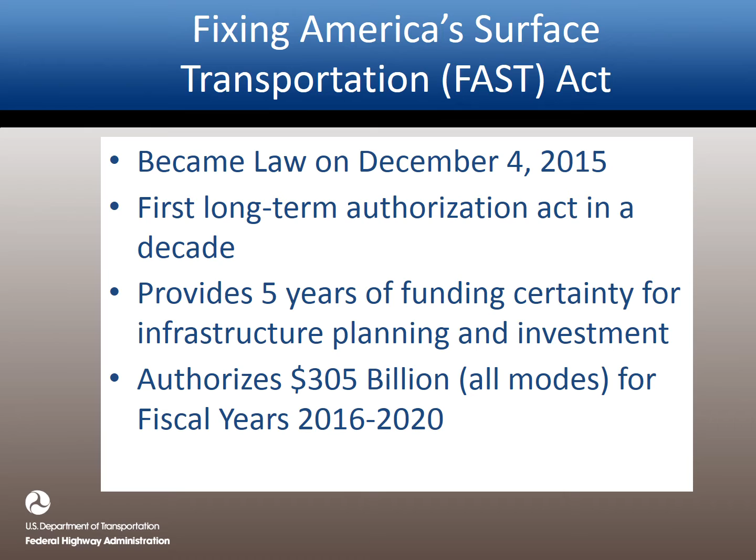But we're all very happy that now we have at least a long-term fund. And this is just those highway authorizations projected for the next 5 years. Of course, these are also subject to annual budgetary appropriations. So each year will actually tell us whether or not we'll get the full amount that's in the law or not.

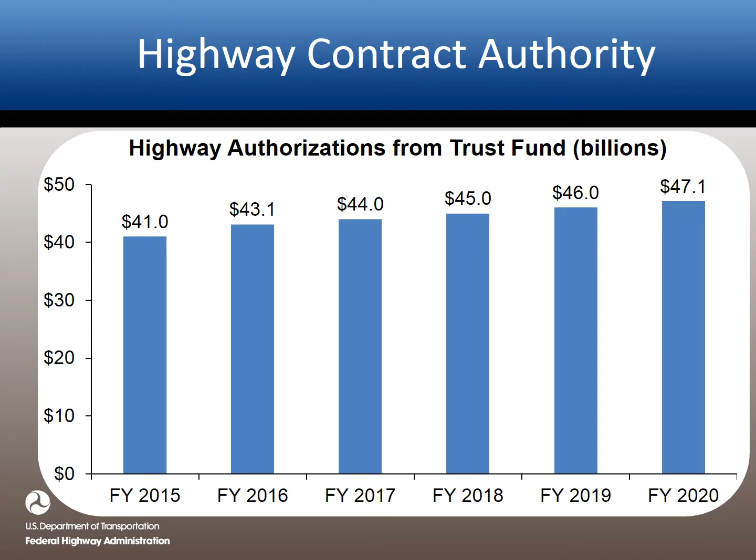So with that, I'm going to transition to more of the technical things.

Many of you know that we've got a couple of these expert task group meetings. They're really open meetings with the goal of having everybody within the industry and the community talk about technical issues. Anybody can attend those, and we encourage as much attendance as we can. It's very much an open dialogue, and you get to see the good and the bad and the ugly with everything that we do within the industry here as well.

Our last meeting was last September in Oklahoma City. John Bukowski, who many of you know, is our team leader in our office. He manages the mix and construction ETG. I manage the asphalt binder ETG now. So I'm going to touch a little bit on both of the outcomes of those two meetings in September.

We also have a sustainable pavements technical working group, and that's in kind of a hiatus right now as we work through the FAST Act program to see how that has impacted the sustainability program. But Gina Ahlstrom in our office also manages the sustainability part, pavement sustainability.

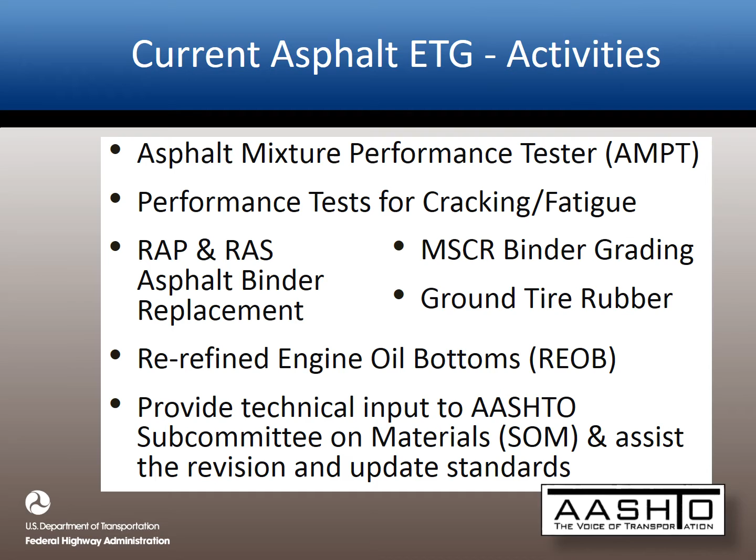I'm going to start by looking at cracking, and you might say, well, what does cracking have to do with modified asphalt? But I think most of you know it has a significant impact on performance. Some of our initiatives on the mixture side involve all the activity within the industry trying to either develop or narrow into one, or a series of 1, 2, or 3 cracking procedures that we can really rally around.

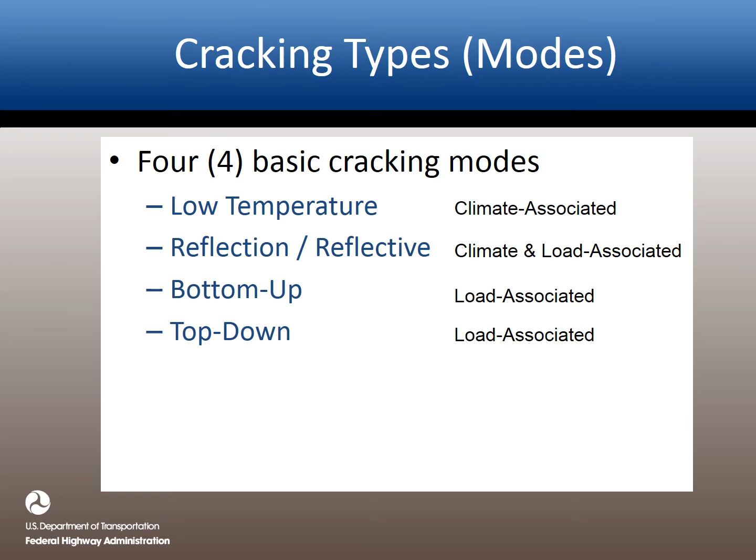So there's 4 basic cracking modes that are being discussed right now: low temperature, reflection, bottom up, and top down. They all have different mechanisms, and they all have somewhat different tests now being targeted to address those. The 2 basic loading modes being discussed right now are the monotonic, or single loading, and the cyclic loading. I think the majority of people understand that cyclic loading really represents more of what the materials see, but you also have time constraints and other things.

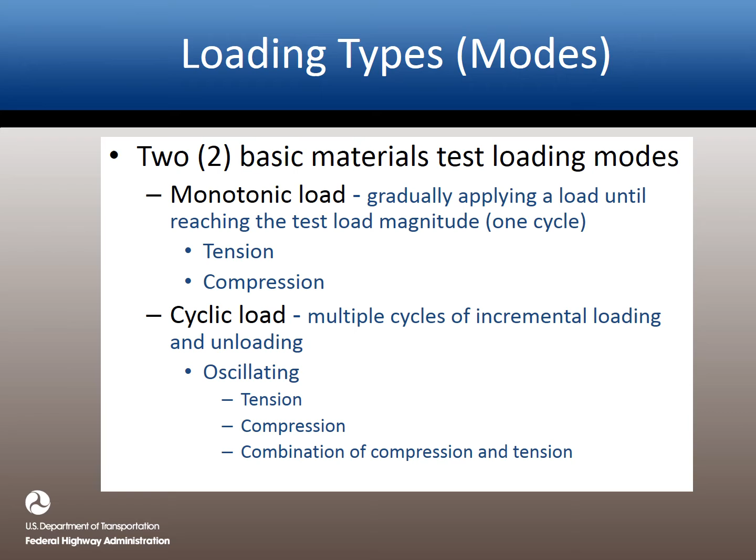So there are some people that are looking also at the much simplified monotonic tests in order to evaluate cracking performance as well. If you look at the broad range of the different tests, and I'm going to show another slide that includes what they are by name and the standards associated with them, you can see that there's a broad range of different strain conditions as well as number of loads, from that single one monotonic load to the cyclic or repeated loading. And they all have different mechanisms that are associated with those.

We all know that in reality, our pavements experience multiple load cycles, multiple load magnitudes, multiple strains, multiple temperatures. And so the struggle with the industry is how do we manage to try and capture the performance of our materials across those multiples, but also make it to where it's not onerous or something that most people can't do in their own laboratory.

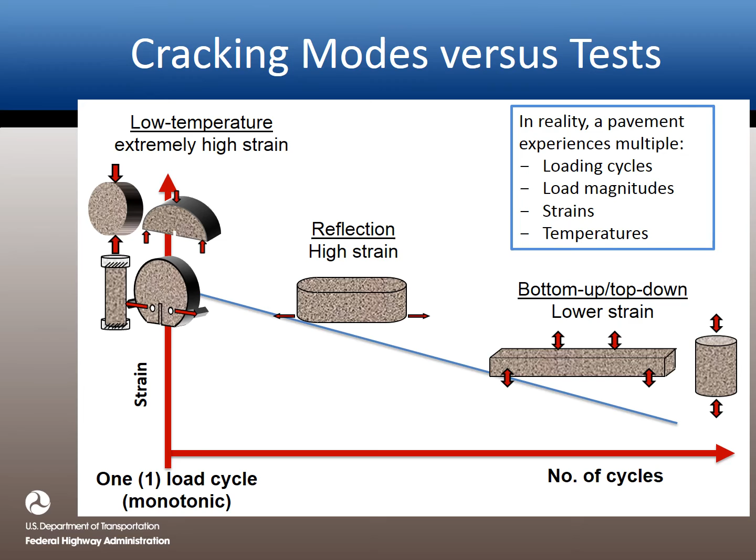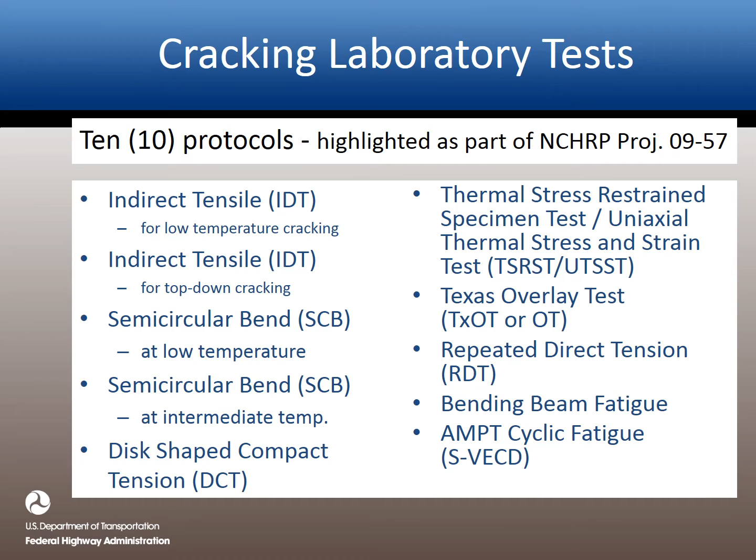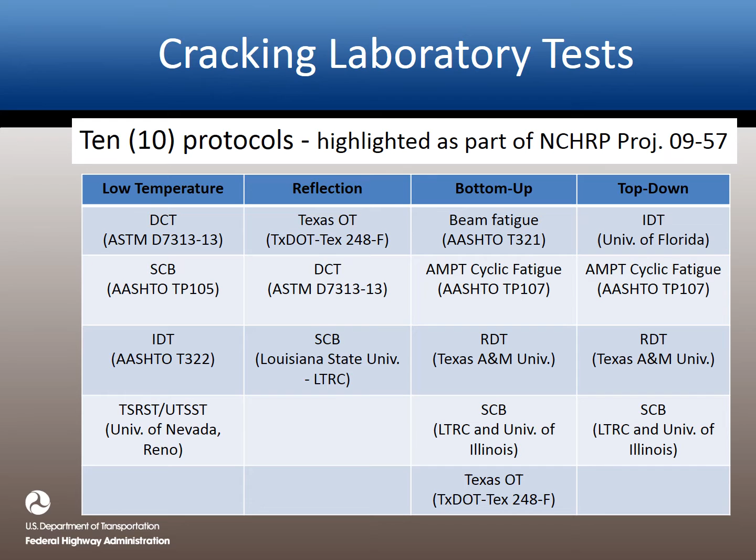This is just a snapshot of all the standards that are available for these tests. Some of them are standardized within ASTM and AASHTO. Others have state or university issued standards. Some of them are still in research and development. Some of the standards are still in provisional status and are working through improvements with the standards bodies and their technical communities as well.

I'm again going to focus on the asphalt mixture performance test because we put a lot of money and effort into the support of this equipment, as well as the strengths of the information that comes out of it. We've got a lot of standards in place already, provisional standards that run the gamut of looking at the real mechanistic material properties of the mixtures under similar conditions as what they would experience on the highway.

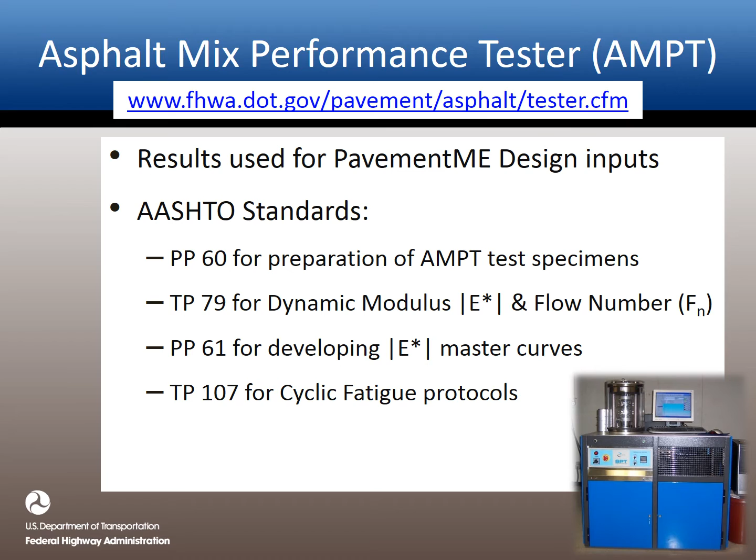And the most recent one is the one you see there on the bottom, the TP107 test, provisional for the cyclic fatigue protocol. On top of the dynamic modulus E-star test for stiffness, which is a direct input into the pavement ME design software, which Dr. Hall is going to talk about later on today, we also have flow number testing for rutting. And now we've got the companion cyclic fatigue testing protocols as well, which in my opinion aren't that complex.

The analysis methodology is complex, but I only have to hit a button on a computer to do that. I relate it a little bit to like a DSR. Binders are very complex; the DSR equipment does some very complex things in testing the material. The analysis is very complex, but we have technicians that can manage to run that equipment, run those tests, and give us very meaningful data in order to characterize our materials. And so this is a similar circumstance here with the cyclic fatigue.

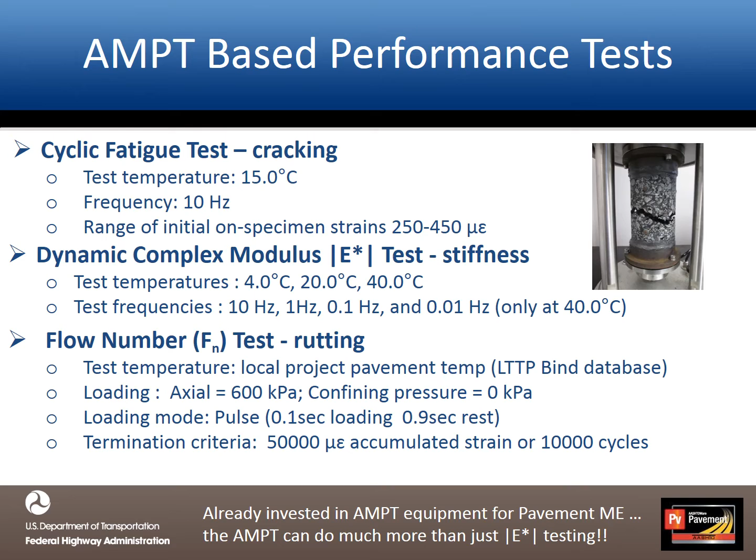So why are we looking at it? So I tried to get a top 10 list, but I failed, because I only got to 4.

Really, it comes down to the strength of the test and the information it gives you from your materials, but there's also a very strong history and pedigree that starts with the aerospace industry. There's been a lot of work to get us to this point from within our industry and outside of it, looking at material fracture mechanics, to get to where we have a very simple piece of equipment readily available to the community, and the standardization part, which is important to make sure everybody's doing the same things.

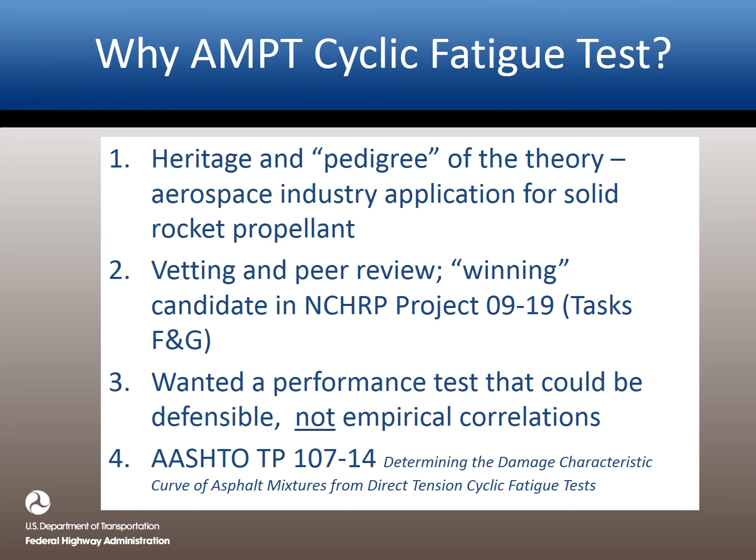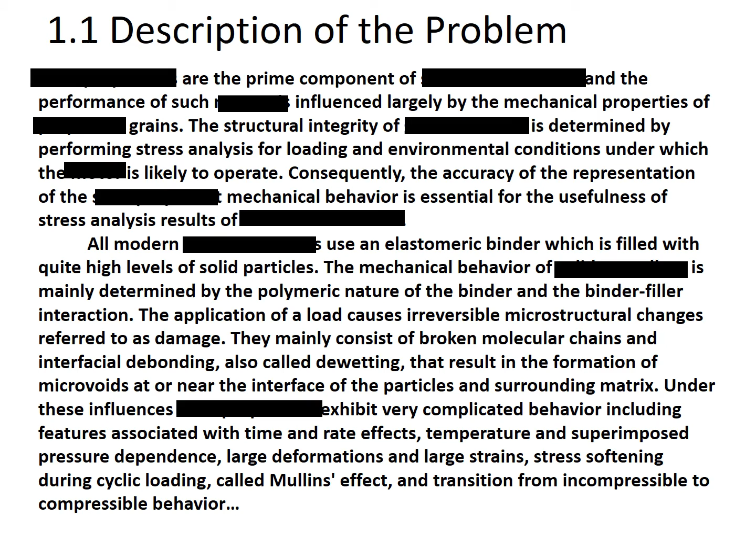If you'll let me divert a little on the background, I think this helps with understanding why we're coming this way. If you read this description of the problem, I'm not going to read it word for word, I'll let you digest it, we've redacted some of it for you to consider. You'll probably guess this isn't necessarily from our industry and community, but as you read it, it really does sound a lot like asphalt, doesn't it?

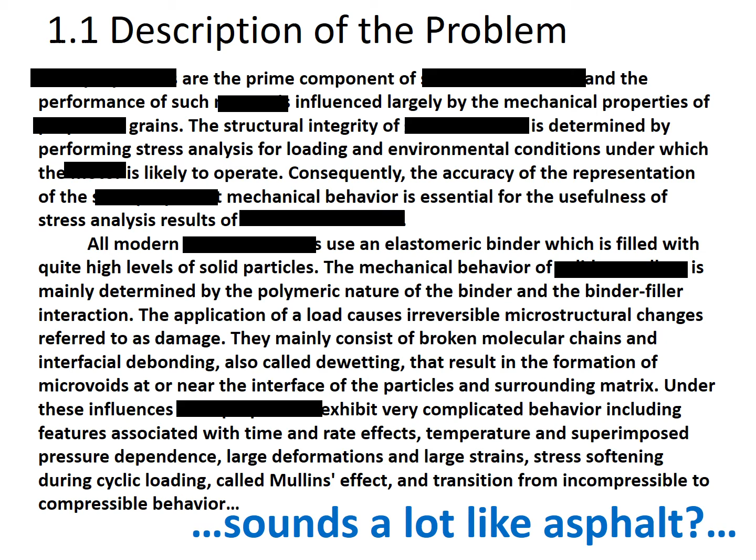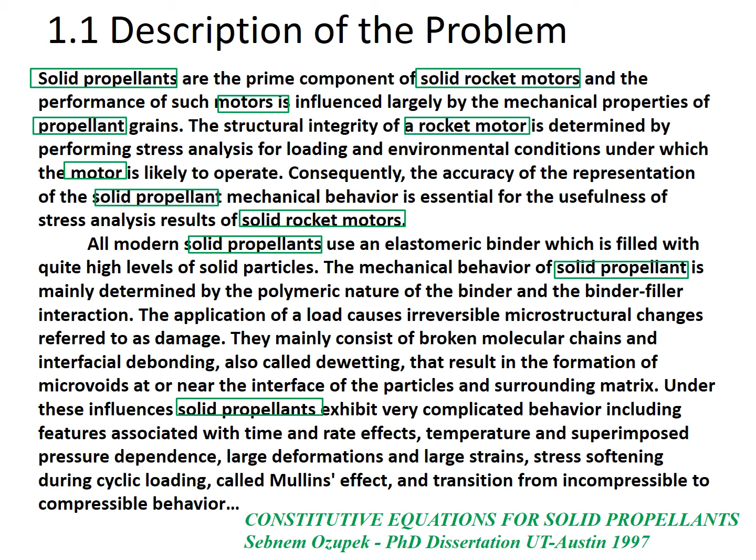But if I remove the redactions, really what we're talking about is rocket science. And you say, wait a minute, rocket science, materials, how does this all play together? Well, I don't want to make you believe that I know what a rocket scientist does or that I can design those things. But I can tell you that the methodologies for evaluating materials being developed to characterize our materials now have a solid foundation in rocket science and solid propellants. I think there's a tremendous strength there with regards to characterizing materials and modeling them as well.

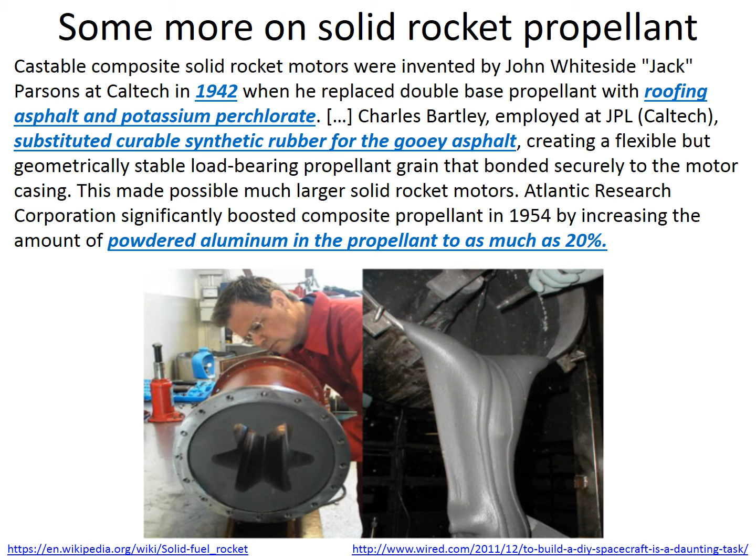So initial solid rocket propellant was primarily asphalt or rubber and mixtures of other things, and there's a long history on this going back many, many decades. That's no surprise, there's lots of information out there. For the sake of time, I'm not going to dwell on a lot of it, but I want to get to a point: now we've got very large applications of solid rocket propellants. And there's something critical to these when it comes to mission safety or protocol, and that's fracture of the solid rocket propellant within the booster rocket. That's a very dangerous thing, it leads to things exploding, uncontrolled burns. So they've spent a lot of time making sure they understand fracture mechanics in these materials, which primarily are a mastic, similar to asphalt and other materials, similar to what we deal with in our pavements right now.

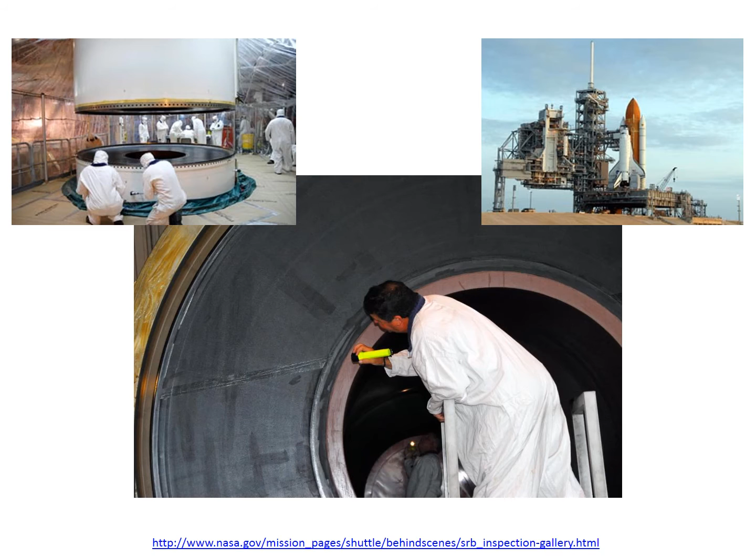So why is that important with the burn rates? There are a lot of different shapes of these solid rocket propellants to try and control burn, how quickly they burn, the burn shape, the burn pattern, how much thrust they get, how long this thrust is maintained. But one of the things is they've got a very narrow window of temperatures where they operate with maximum efficiency. And if they're outside of that range, they tend to have cracks or fractures within that propellant. And if left undetected, which is very hard to detect when they're in that totally fabricated state in a rocket, things go incredibly wrong.

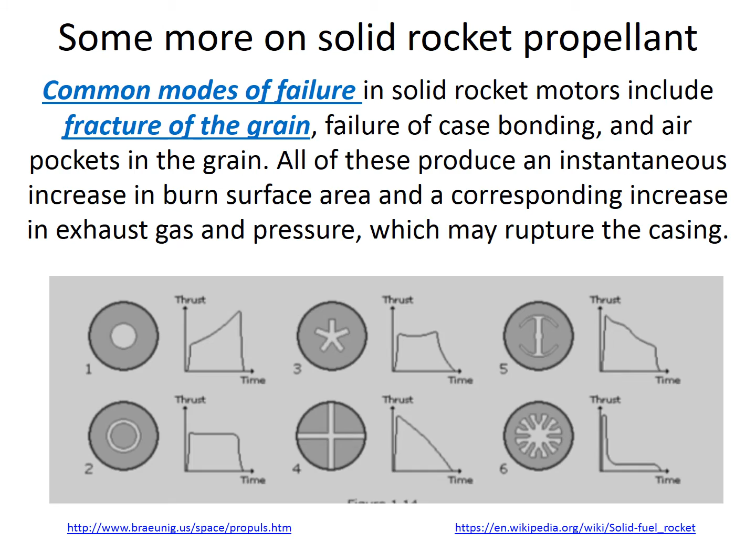I do have a brief video here that I think is great, I love these old videos, so some of it is a little bit for entertainment value. John, if you could slide forward to about 8 minutes, 30 seconds, this gives a better idea of understanding what I'm talking about for the basis.

Primer to set off a larger charge of powder, which in turn ignites the propellant charge. From this point on, the action is just as we've already explained. The high-pressure gases created by the burning propellant, accelerated by the nozzle, act to give the motor thrust. All rocket motors carry both oxidizer and fuel, both mixed together in solid propellant grains in such a way that they remain inert until ignited. Fuels most commonly used are asphalt and oil, rubber, or rosin. Oxidizers are usually potassium perchlorate, ammonium perchlorate, sodium, or potassium nitrate. There are some compounds which furnish both fuel and oxidizer, such as nitroglycerin, nitrocellulose, or ammonium picrate. Propellants of this type must be mixed with inhibiting materials so they will burn rather than detonate. The regular fuel and oxidizer mixtures are frequently restricted too, but only after they've been mixed and molded according to the design purpose of the rockets for which they're intended, when certain surfaces are coated to control burning. These are called restricted burning charges.

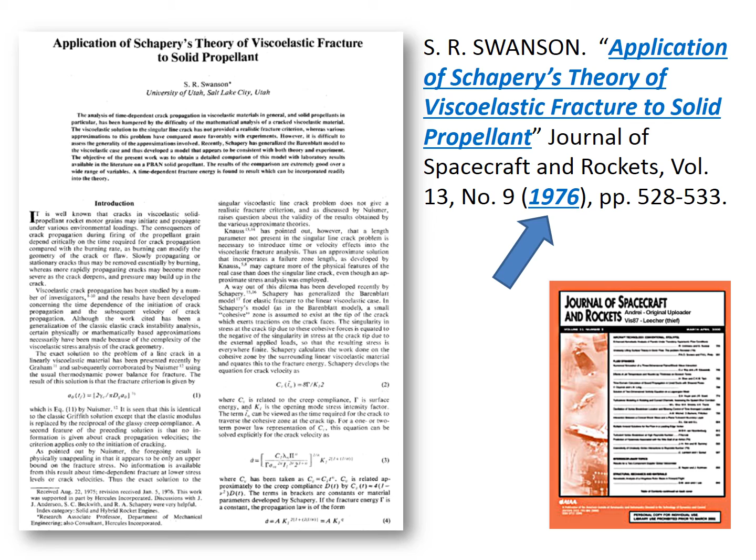That's moved onward into work done by Dallas Little at TTI and Dr. Richard Kim, that's at North Carolina State now, to develop the viscoelastic continuum damage model.

And that's where usually people's eyes start to glaze over, because you start saying things like continuum damage, and simplified continuum damage. And that's where I always like to refocus people and say that these are complex models, they are complex characterizations, but the tests to run and the inputs for those are really not that complex. And we've got the tools to do that now.

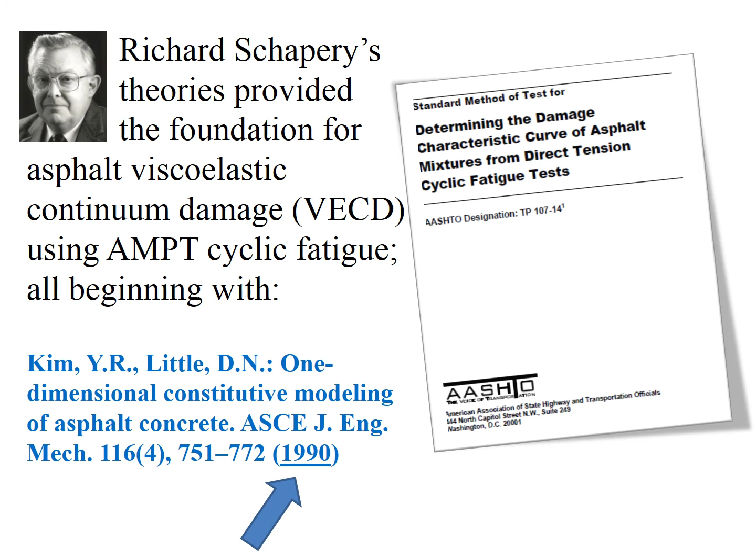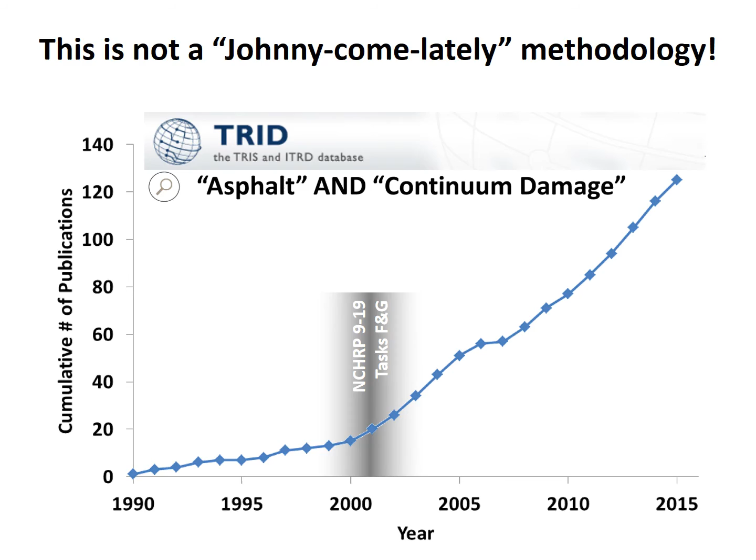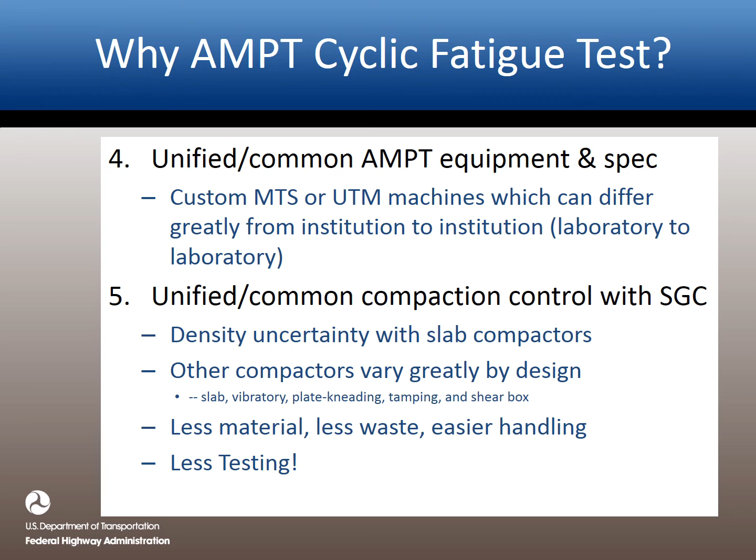As I mentioned, we've got unified common equipment now. We've got unified common compaction controls, unlike some of the other methodologies, the other fracture tests that are being discussed. We've got the leveraging extended time temperature superposition within that system, so now we don't have to test at many temperatures or as many loading or strain conditions that we would have to with a lot of the other tests, and we can get much more meaningful information, similar to what we do with binders as well.

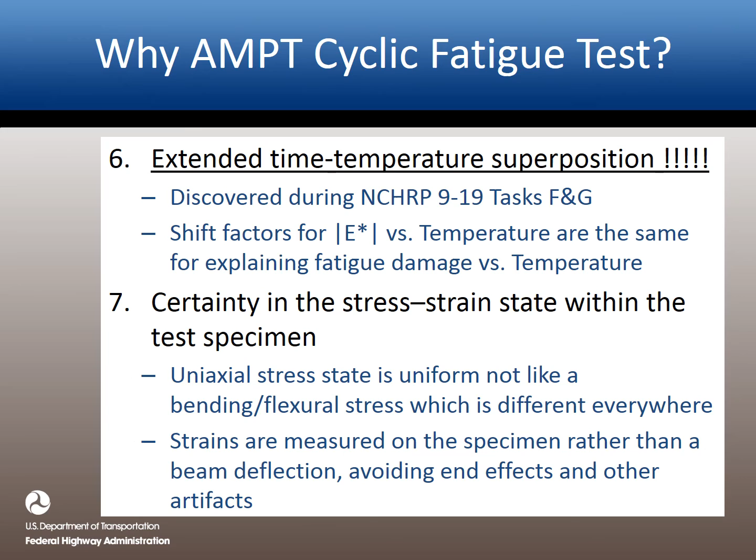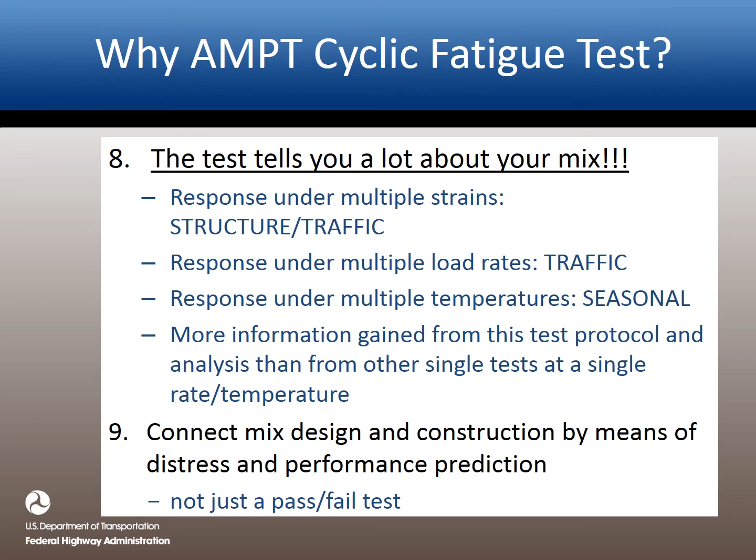There's much more certainty in that stress-strain state within those cylindrical specimens than beams or other shapes that are being used in some of the other tests as well. But the bottom line is really it tells you a lot about your mix, and it connects that mix design to our construction and our distress prediction and what we're seeing actually in the field. So that's something that we're really excited about.

So now we'll get into some other areas, and I'll be quick and brief. We do have a new RAS task force within the expert task group, looking at issues primarily with regards to shingles, because shingle binders are very much different than what we're used to working with.

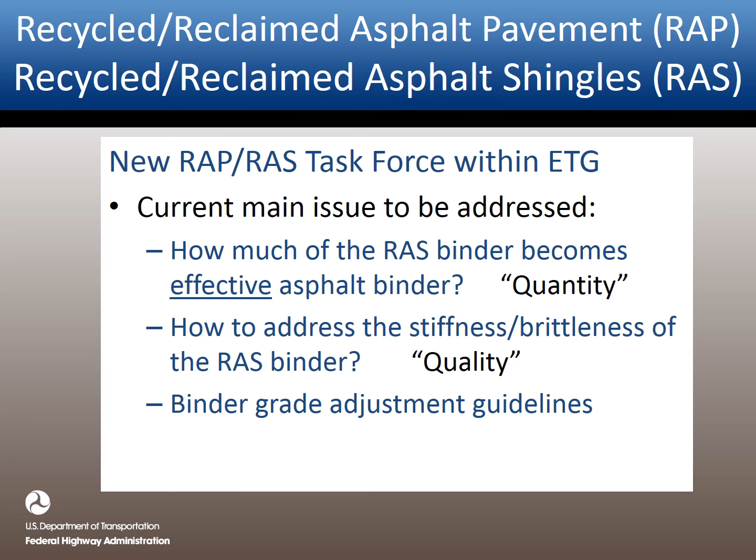They have different characteristics, much stiffer materials. If they've been sitting on a roof for a long time, then they're very highly oxidized as well. So we're struggling as an industry with how to effectively use these binders and how to address the quality of the materials that use those. Right now, the focus is tending towards the brittleness of that blended binder.

There's discussions on what we're calling the delta TC, or critical temperature, determined by your BBR criteria, the stiffness or the S value, and the relaxation critical temperature determined by the M value. You're going to see this come up as a constant theme in a lot of the things that we're doing now to characterize materials, because of a lot of early failures that we're experiencing across the country in the field that aren't always associated with this aging characteristic or this ability to relax over multiple cycles, but it's a contributing factor.

So things like recycled engine oil bottoms and other materials that are getting higher usage, we feel like this is going to be a good tool and a simple tool with tests and data that are already available to us in order to try and control that parameter as well.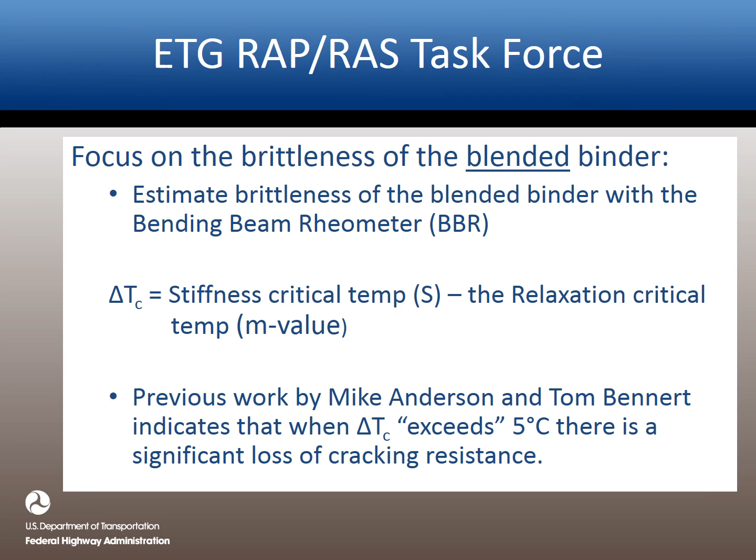From a worst case scenario, we think this will work because the blended binder, assuming it's 100% blended—I think we can all agree that's probably not likely the case with RAS binders in actual practice and construction. But with the assumption of fully blended binders, then we're giving a kind of a conservative approach there.

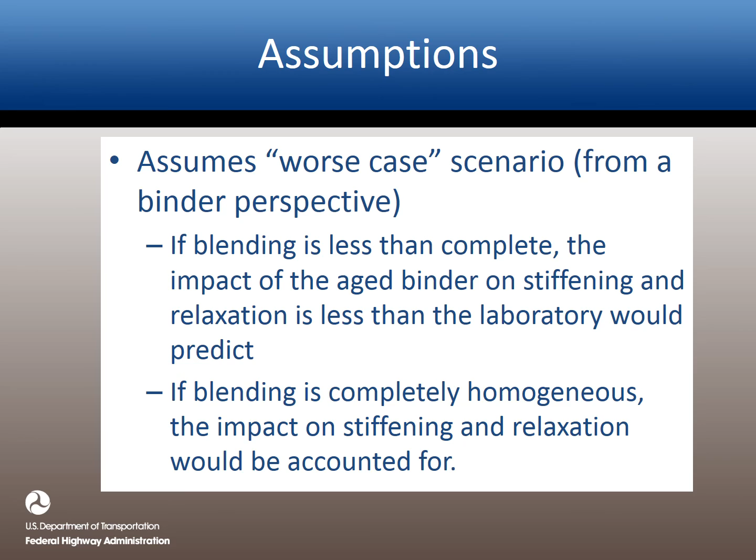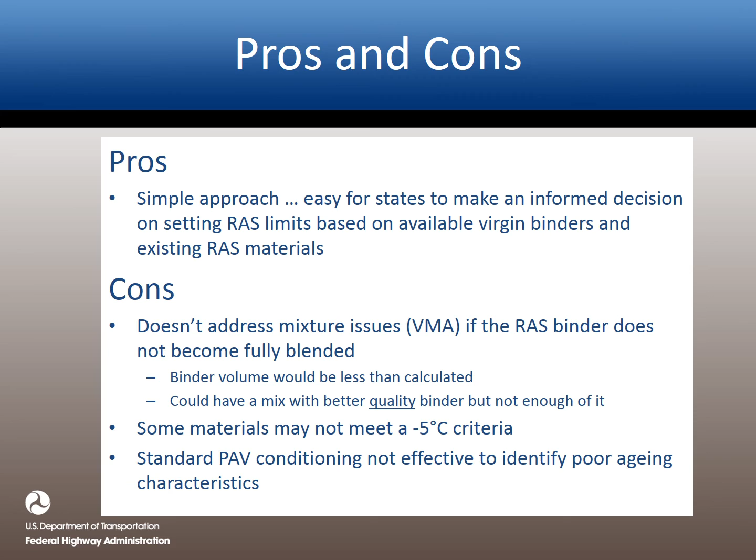There are some pros and cons. I think one of the biggest cons is that it doesn't address the other mixture or volumetric issues associated with the use of shingles, the materials that are contained there aside from just the binder, as well as how do we make sure other materials being used within our industry are not inappropriately caught up in the criteria. That's some work that we need to do as we move forward.

And then it also gets complicated when you add RAP and combine all these other things together like we typically do. So right now we're developing some recommended proposals. We've got a lead on that task group and a lot of other people. One of the recommendations, possibly to further simplify it, is to have a recycled binder ratio limit or a conservative limit based on that delta TC criteria.

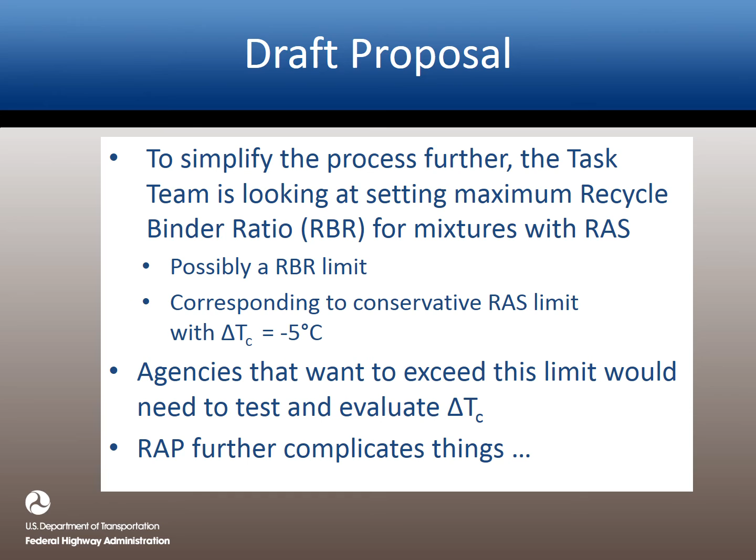It would likely be lower than what we're seeing in practice now across the country as far as weight or volume of shingles that are being allowed. But if somebody wanted to exceed that value, then we would have additional criteria to do additional test and characterization to make sure we didn't have a negative impact.

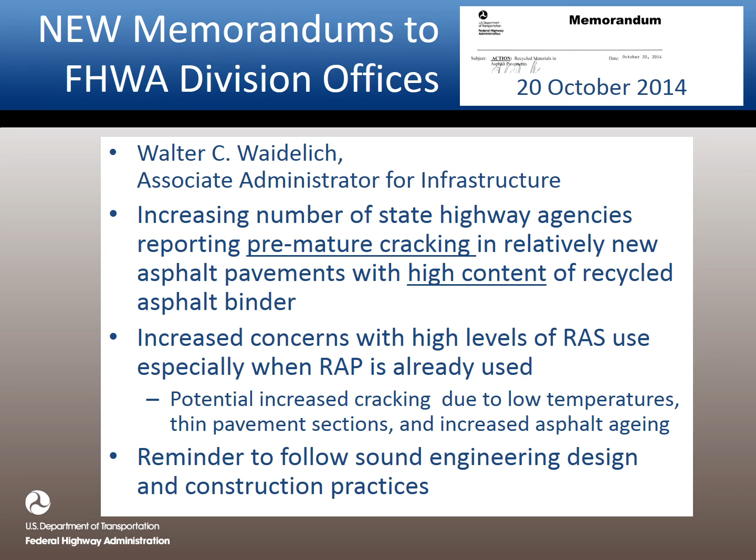I quickly want to mention we've got a couple memorandums out we've issued to our division offices to highlight this issue with our state agency partners, because we very much wanted to get ahead of some of the failures we were seeing in the field. So we've directed them to pay some attention here and work with our state agency and industry partners to make sure it's not an issue within their state and to make the right revisions.

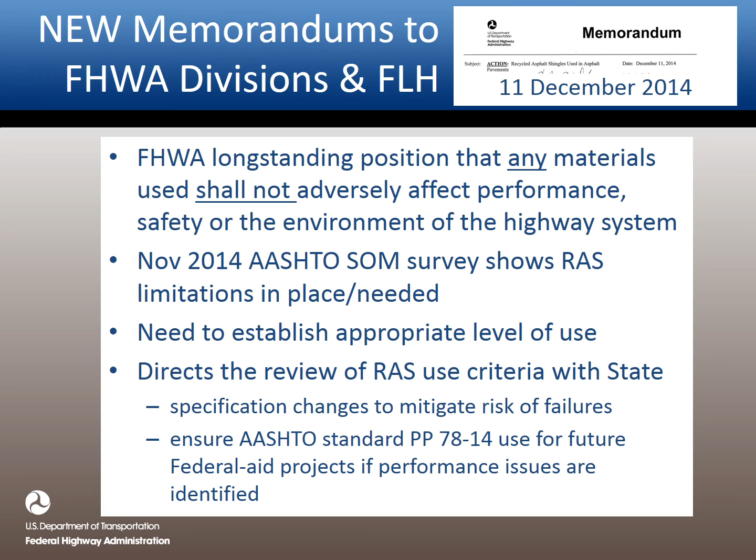We also like to highlight and remind everybody that our long-standing position is that any of these recycled materials should not adversely affect performance, safety, and the environment. So even though they may be environmentally sound and we're always looking to recycle materials, we do have a primary goal of making sure that we've got performance. That's one of the driving factors here in the recommendations.

MSCR activities are ongoing. Mike will probably mention that as well—Mike Anderson, when he discussed some of their activities. We work very closely with AI through that cooperative agreement to get information out and listen to our partners. We are really targeting, as more and more of the use and standardization, regionalization of this standard is occurring, we really do want your feedback on how those things are working for you, to see if there's anything we need to address or refine moving forward. So please work with us and work with Mike and his group to do that.

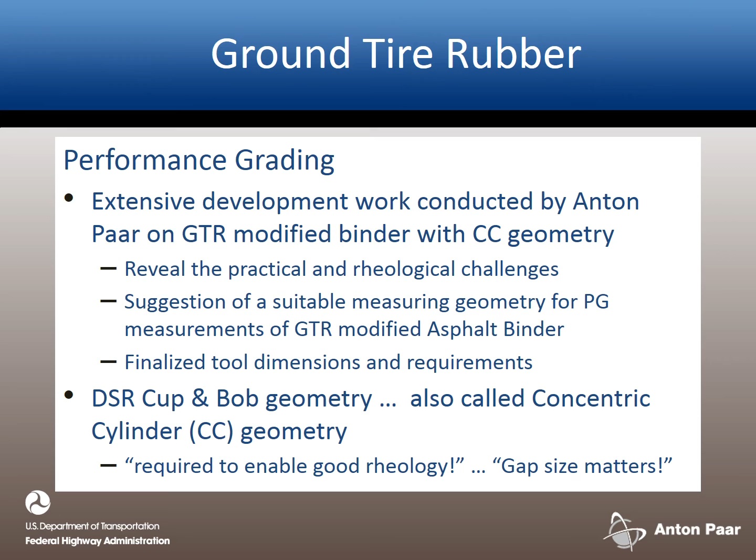Ground tire rubber has kind of fallen off a little bit in urgency, as it was just a couple years ago, but we're still doing a lot of work there. I think one of the biggest activities that have come out of that is the standardization or finalization of the cup and bob geometry.

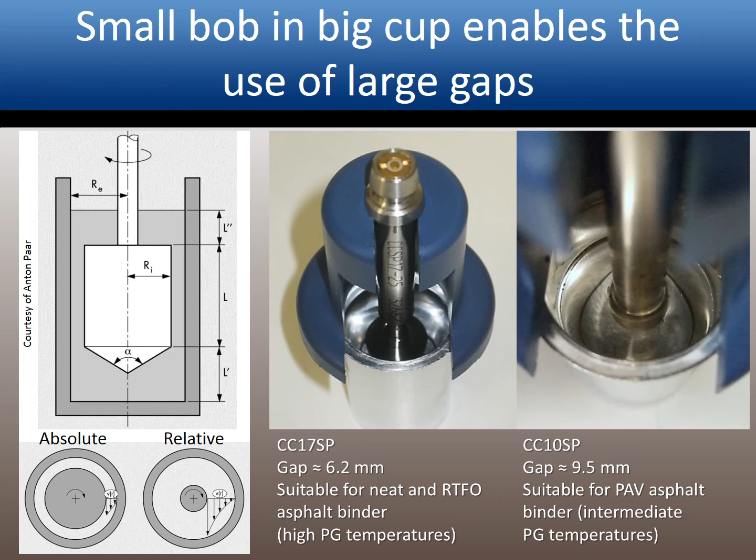That geometry has been primarily driven by work from Anton Paar in cooperation with Caltrans and the universities in California. This is going to go a long way for us to try and move these materials into our PG grading system. We're looking at leveraging all that previous work and moving forward with characterization protocols using the cup and bob geometry.

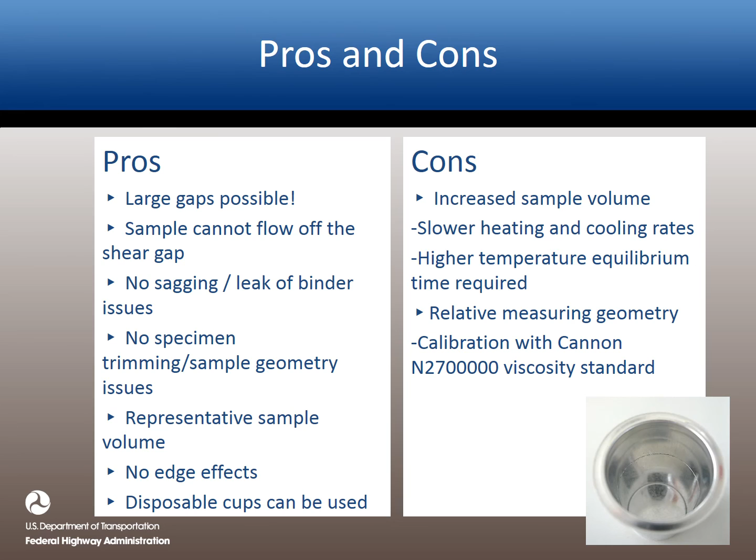There are, like anything, pros and cons. It's a larger volume of material, and it's going to take a little bit longer to heat up and get temperature equilibrium, things like that. But I think the pros far outweigh the cons.

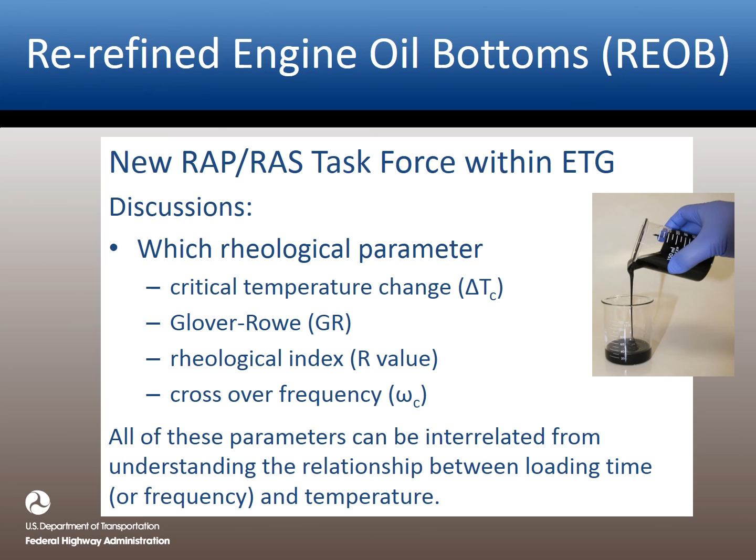Re-refined engine oil bottoms - we have a new task force on that item as well, looking at rheological parameters. That one's also coming to fruition, focusing and moving forward with delta Tc criteria. It fits into the same characterization scheme as far as making sure we have materials that don't age at an accelerated rate and still provide us that relaxation over multiple environmental and loading schemes.

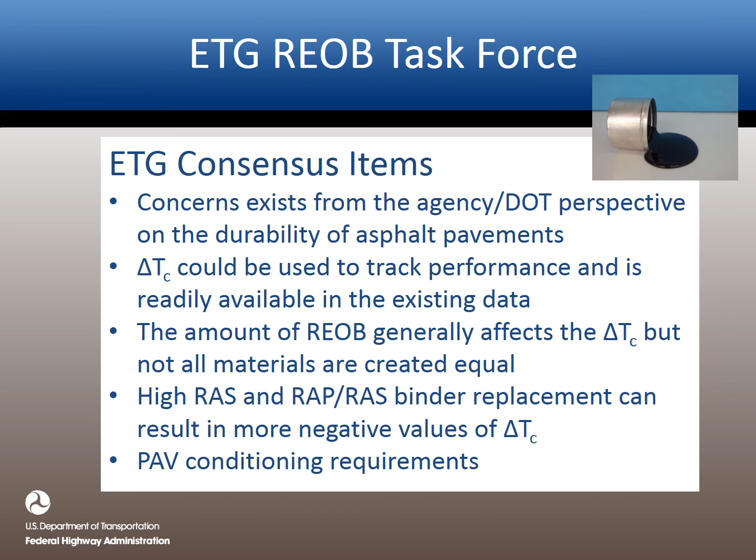There are some consensus items on the delta Tc, and there's some other guidance within the industry and within the Asphalt Institute and their technical committees that will be coming out soon, moving us more in this direction. So we think that's going to be one of the primary tools we use to evaluate these materials moving forward, to characterize how they perform and establish some sort of use limits or guidance.

As I start to wrap things up, one important thing that will affect you guys as producers is we're revising the LTPBind software with some significant improvements as far as the weather data. We're looking for volunteers, but we're tapping into NASA climatic data - that's real-time data, a very advanced amount of data.

We're leveraging that, and instead of relying on dedicated land-based climate systems with equipment, we can basically lay out this satellite-based system in a grid pattern across the United States. We can get information down to very small distances, about a mile to a half-mile, instead of the hundreds of miles between our land-based stations right now.

Without getting into details on the MERRA data, we are releasing the alpha and beta versions, and we're looking for people to evaluate those. Please contact Larry Wiser if you're interested in looking at that new revision and new release, and give us your feedback. We would very much appreciate that.

The final notice is we're starting a new initiative within the agency this year, targeting 10 states with some dedicated funding for us to pilot demonstration projects to advance initiatives on increased pavement density. We're looking to get 10 states by the end of this year to take their existing technologies, not require anything new or implement anything new, but raise the bar and try to achieve 1 or 2% increased density.

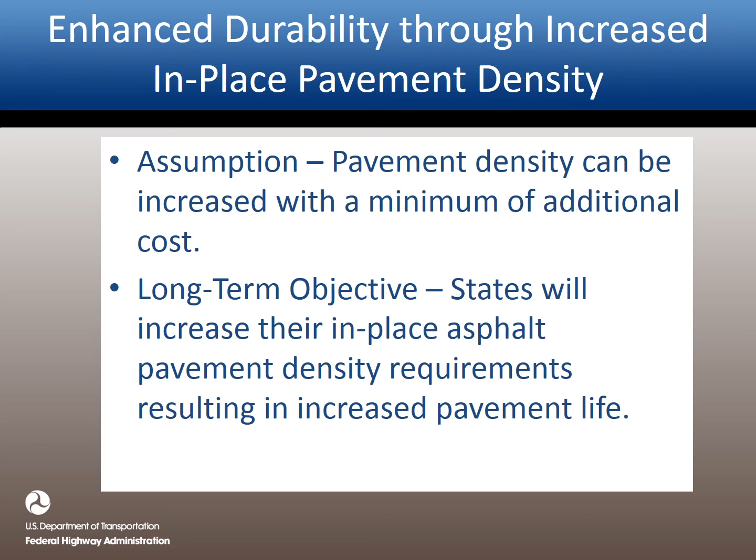So the tools we have available for materials, as well as things like intelligent compaction, optimized mix design or balanced mix design, and making sure we have proper effective asphalt content - we feel like this is very easily achievable. So we're going to be piloting that as we move forward.

We've generated a lot of data and past historical information on what just a 1% increase in field density means with regards to performance life. I think for us to stay competitive as an industry in the environment we're in, this is going to go a long way to help us do that.

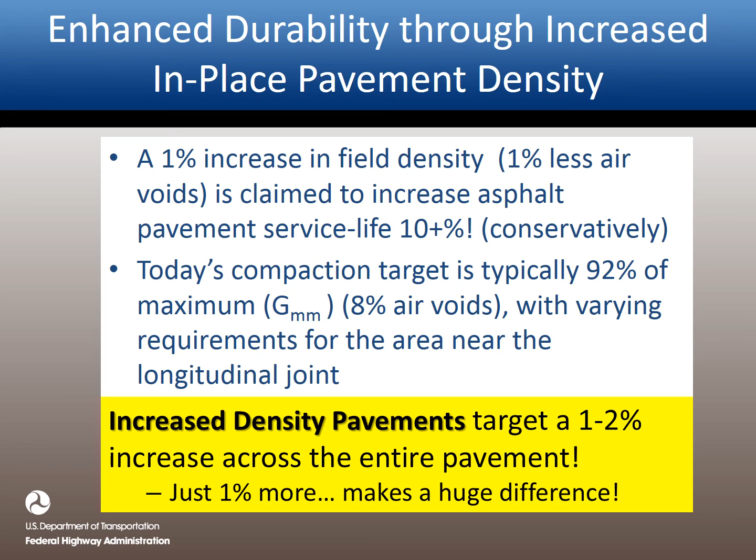As always, we're always looking for partners to showcase and evaluate materials. So another part of my program is the Mobile Asphalt Testing trailer, or the MAT. It's funny how that works out.

I know I used my full allotted amount of time, but if there's one quick question, I'll be more than happy to take it.

Excellent. You're still waking up. I appreciate the opportunity.